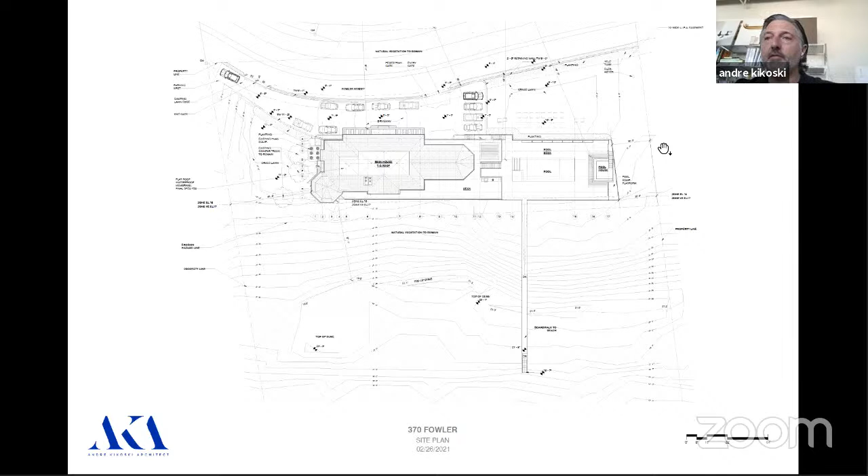So the site plan is very straightforward. The ground floor has a 300 square foot entry zone right off the driveway, and is otherwise storage and parking.

And then when you go up a level to the first floor, the house is currently an upside down house, and we are preserving that. So there's a central axial staircase and landing opening into a den. Otherwise, it's bedrooms and mechanical rooms and some family lounge space, with a pool house at the end of the pool, which is also existing.

And then we go up a level to the second floor of the house, where with a few tweaks, the plan is intact as well. There's a large lofty living room where you actually see through the house. Adjacent to that is the dining room and media room, with the current kitchen in the nib addressing the pool. Then to the page left of the living room, we have the master suite with a sitting room and his and her baths.

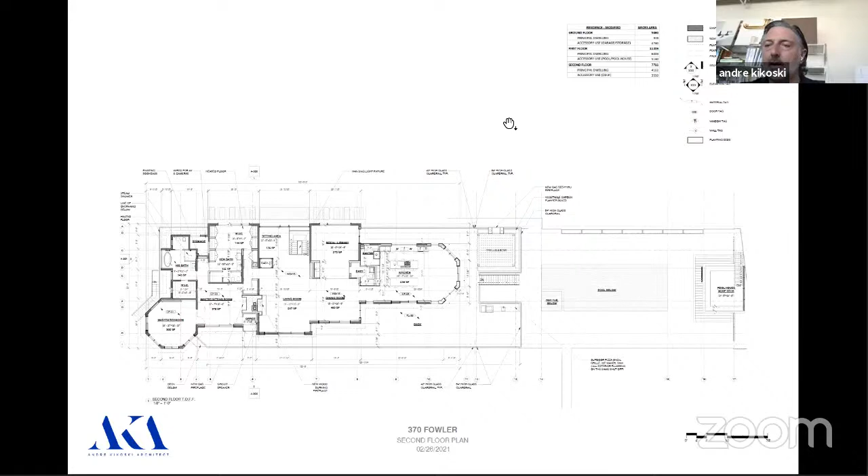So again, we've stayed within the condition line of the existing structure with regards to the floor plan. The next page will show the same is true with the roof line.

So we can look at the elevations of the house, and what we've done is twofold. One is we wanted to remove a lot of the extraneous flourishes, wing walls that had nothing behind them, huge sweeping roof lines that didn't really contribute anything to the aesthetic of the house. Instead we thought of a board and batten style farmhouse structure where we wanted to clean up the massing and really pare down the house so that it's very crisp and clean. And of course, we wanted to open it up to the view.

So the house is on a plinth of a tumbled limestone and granite mix, and then above that we have a vertical patterned material that resembles board and batten. Given the particulars of the oceanfront and the microclimate, the effect it has on wood and siding, this material is actually a manufactured stone. It's comprised of cement, marble dust, and resin, particularly suited for oceanfront application. There's a vertical line in it that you'll see in the renderings that gives it a nice and quite beautiful scale. The roof also is a shingle style roof with a dramatically simplified roof line.

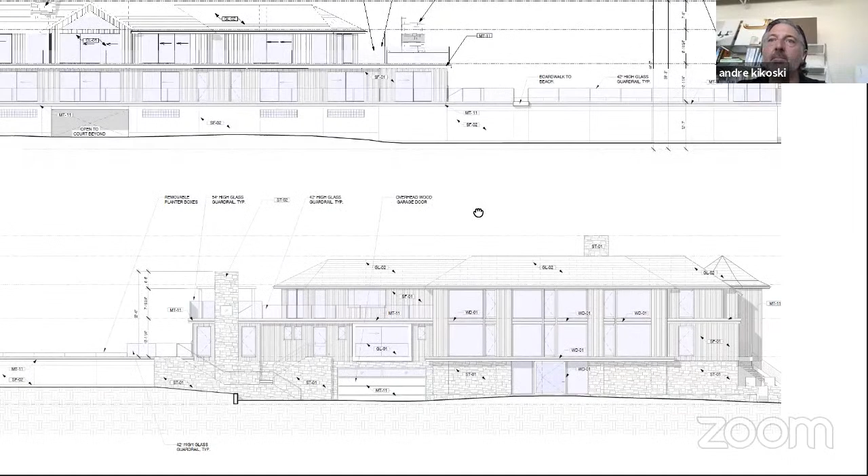And we are very sensitive to the environmental impact of this property and are working with Tesla to have solar collecting tiles on the roof. So the front of the house is essentially a farmhouse style approach that's very crisp and clean. The back of the house is opened to the ocean views beyond.

The panel system that I was talking about wraps everything above the plinth, and below the plinth, which will be obscured largely by the growth on the dunes, is a simple and very quiet stucco on the back of the house, whereas on the front of the house, it's the limestone we discussed. So it's a very crisp, clean, and simple approach to the front and rear elevations.

There are also side elevations showing the existing octagonal structure at one end of the house, sections through the pool, and a very simple and streamlined pool house at the end of the pool as well. And we've incorporated plantings throughout, so there are live green walls that live on the house as well.

I believe we could show you the materials. So the Tesla roof tiles look like a slate tile, very simple and very clean. The siding at the base is a blend of 3 different types of limestone veneer in different sizes and colors, to give it a casual and vernacular feeling, as if there's a bit of history to it.

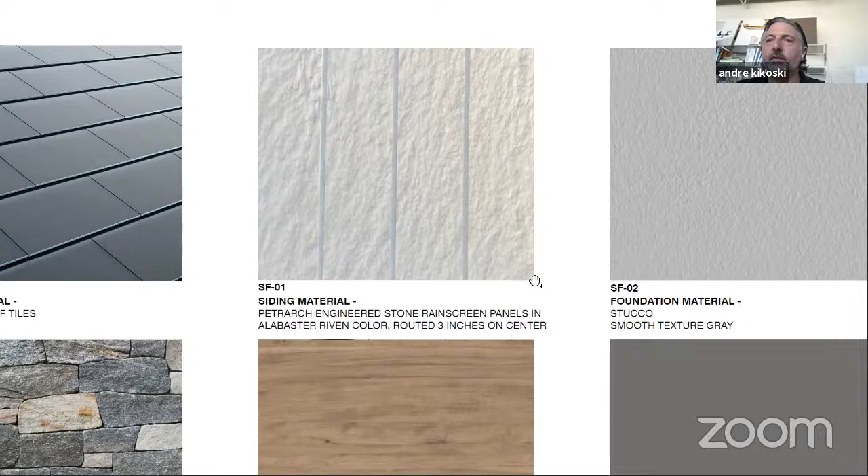There's shade and shadow even in this scan on this board. And then we're going in and routing in vertical joints every 3 inches on center, which would give the appearance of a wood structure as well. So it's a very interesting material, one that's particularly suited for the harsh, salty conditions of the oceanfront.

And then, as we mentioned, the foundation is trimmed in stucco in a complementary gray texture, and trim and gutter is in a powder coated aluminum.

Our window systems are a large format sliding, the Revival Core Vision Plus, where the mullions are about 3/4 of an inch. Casement windows have a heftier frame, but it's all part of a consistent package of lower profile mullions, very crisp and clean and coordinated.

There's some glass block allowing light into the basement spaces on the ocean side, and a 4-panel garage door with wood, again referencing what you would see traditionally, with a slightly cleaner twist.

And we also have shown our door hardware as directed on the application.

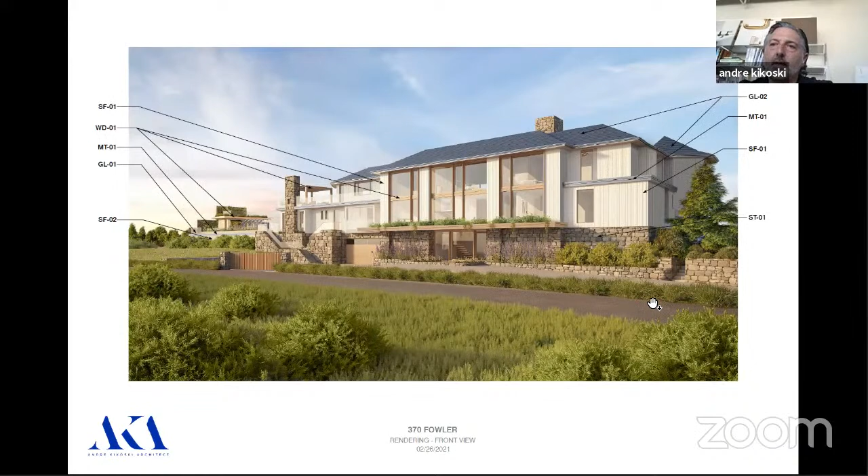The next image shows how this all comes together with the large principal entry place volume pointed out. There's a canopy, a wood trimmed canopy that's planted that you drive below, a large central bay with the internal staircase on the left of that, and landings and sitting rooms above it.

You get to see the very fine texture of the riven panels, the Petrarch panels, which has a nice play of shade and shadow even in the rendering. And again, the stone reappears as trim on the chimney.

We thought of how beautiful this would be, how the material is compelling because it will look just as crisp and clean 10 years from now as the day it goes up. So the idea is that the aesthetics of the house are very much considered part of the vernacular of the farmhouse, and also to weather beautifully on the site, so they really feel like they belong there.

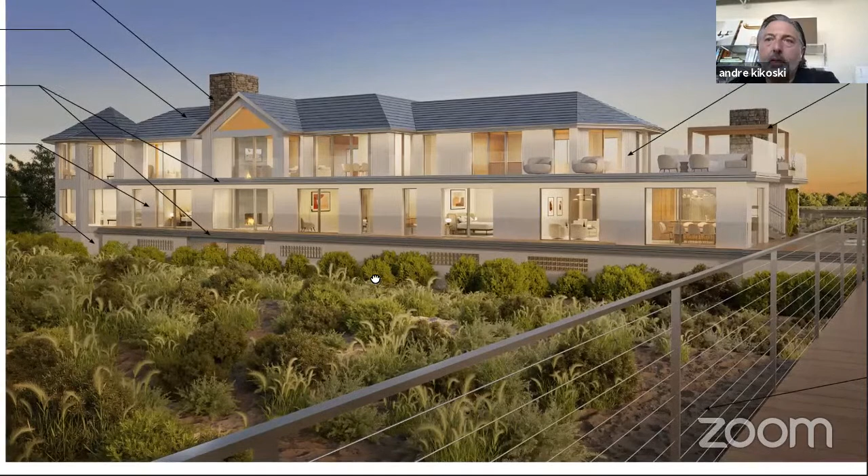And then the back of the house, which is on the next slide, shows how the house really just opens up to the view and takes advantage of its setting on the dunes, following the openings, the apertures of the existing residence, and we've just kind of enlarged them to take advantage of the waterfront location.

Again, very, very simple and clean. There were reasons why we also wanted to break the plinth from the house above, but I just wanted to introduce the design approach and our intent to look to the vernacular that's part of the farm tradition as you pull into Fowler as an inspiration, and also to talk about our research into sustainable materials that are recycled and energy efficient and appropriate to the climate of the site.

Okay, yeah, thank you. It's quite a complete presentation.

I'm the lead board member on this application. My comments are this, and bear in mind, this is a preliminary, so we will not be voting on it.

First of all, I think this is an improvement over what is existing. The house that is there now almost looks out of place. And I think this will probably upgrade the neighborhood also in that area. I don't have a problem with it.

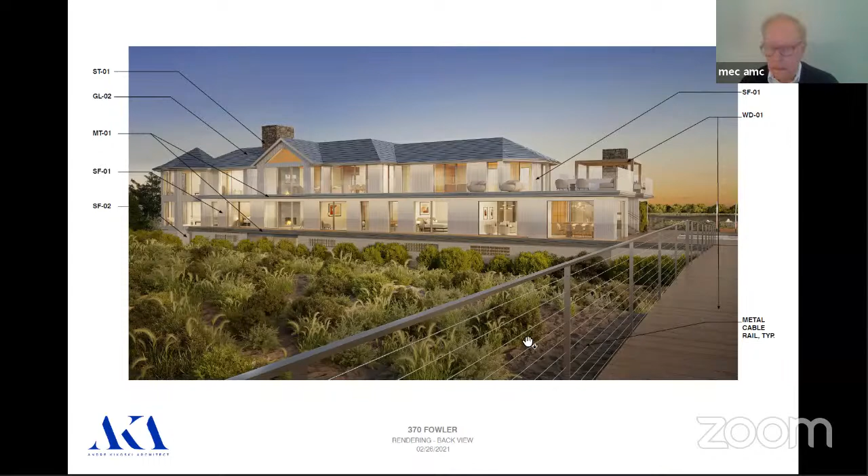One question I do have, what is going to be the square footage of the residence afterwards? Liam, do you have the tabulation of the existing versus where we wind up? Basically, while it looks - oh, here we go. Thank you.

Okay, just the facts, Liam. Yeah, so here we go. The first floor, the principal dwelling, is 6,000 square feet. And the second floor is 4,000 square feet.

Okay, when you do submit this, it will have to come before a full board review because of the square footage.

Okay, got it. So, that's my comments. Mr. Jankowski, comments?

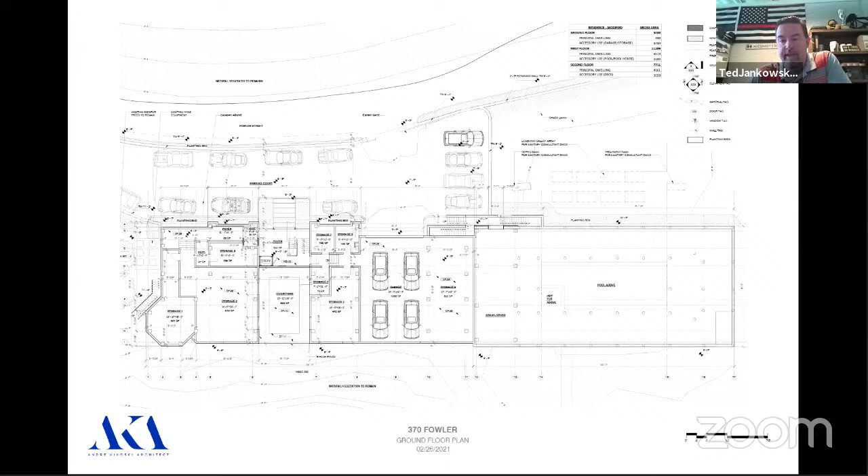I think it looks good. I like how we kept pretty much the same layout that the original house had. I think you did a really good job, Andre. It looks really good.

Thank you. We have exceptionally wonderful clients, and they've also wanted to do something that is thoughtful and meaningful. So we're lucky that we have such a wonderful team. Okay, so thank you.

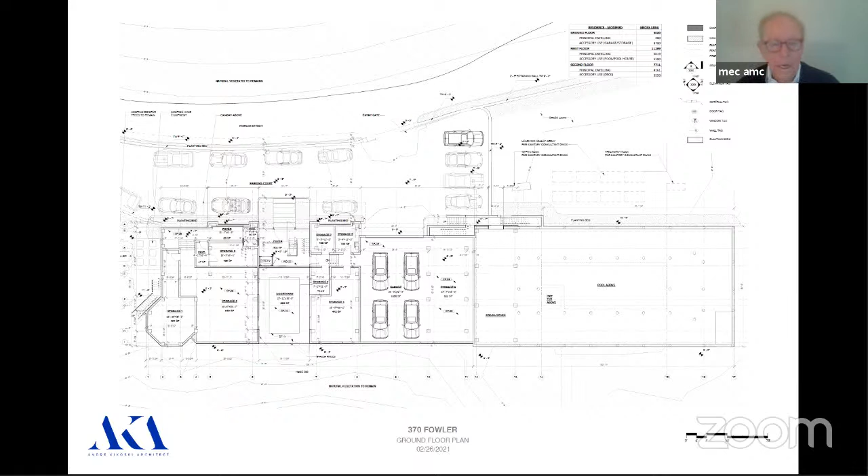Thank you, Mr. Jankowski. Mr. Burke, comments? No, I was just curious if the Tesla roof panels cover the entire house.

They cover the entire structure, they do, except for the flat portion on top of the house. And then it's just simply a question of, based on a solar map that they prepare, some of the tiles are active and some of the tiles are not active, but there's a consistent aesthetic of all of them.

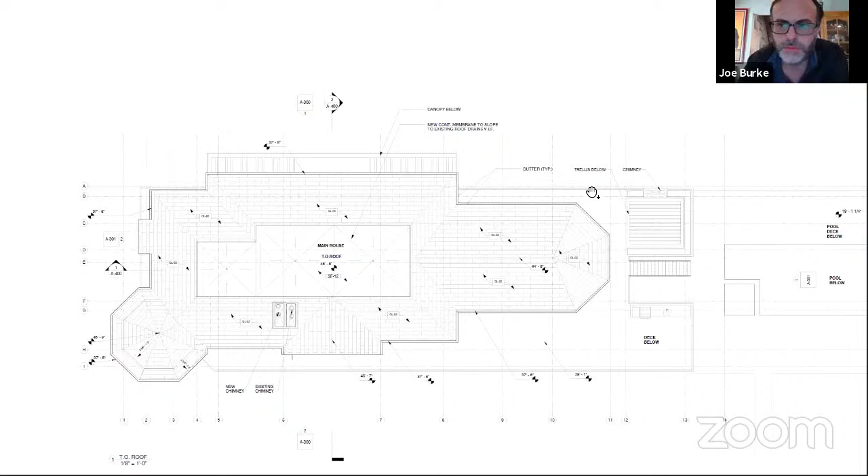Okay, thank you. I was happy to see this. This looks like we can maybe get past that ungainly panel impasse, so that you have something that pretty much looks like black slate and is uniform as opposed to sticking out. No matter what you do with the current solar panel technology, it looks like a sore thumb.

This is just so exciting, actually. I agree. Yeah, I mean, right now that's all I'm using is the Tesla panels. Oh, brilliant. Okay, great.

Ms. Keyes, comments? I agree that the place is beautiful, and I think it's fantastic. I love the Tesla tiles.

I really would like to see a landscape view and where in the dunes all of that decking is going. Because is that new, the decking, just from the beach view? Did you want me to respond to that?

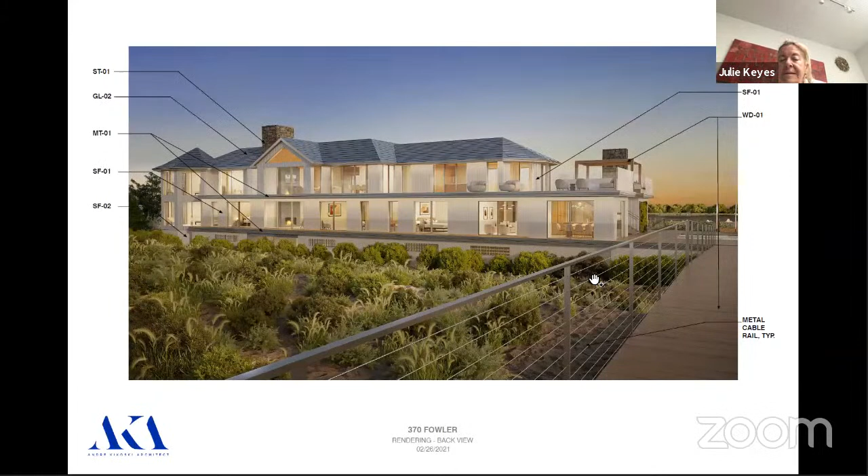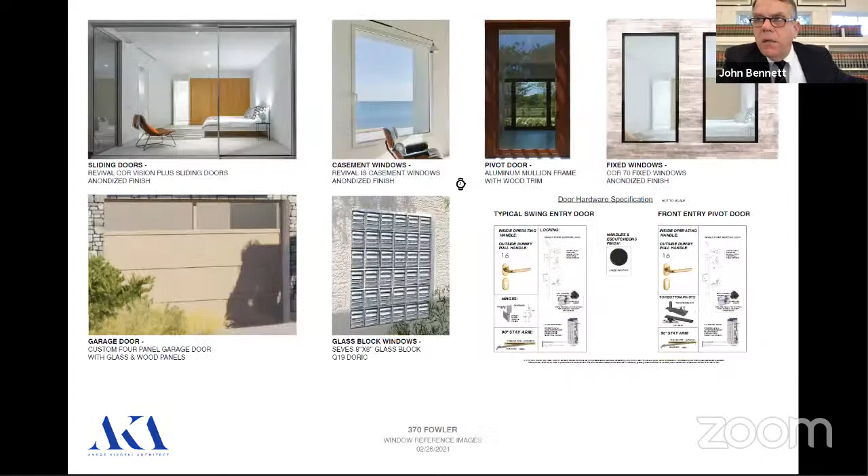I would like you to. Is there a pool in the dunes here? Is that new? No. The pool is right, it is. Everything has to be behind the existing southerly face of the house. And everything that's being done here has not only been conformed but vetted with the building department.

But yeah, I think it would be helpful to have a site plan which shows that. I also feel that, being that it's on the dunes, there's two real faces. The face that the water sees is as important as the face from the front. So I'm just curious as to what that view is and how much decking is into the dunes. Just curious, but I do think it's beautiful also.

Well, I'll just say that none of it is actually in the dune. That's just as a lawyer, a land use lawyer. I just want to clarify, we're not in the dune. But it's the view also.

Of course. And Andre, I would just clarify that all of the existing outdoor decking is remaining. It's just moving up vertically. So there's no new expansion beyond the existing footprint of the house.

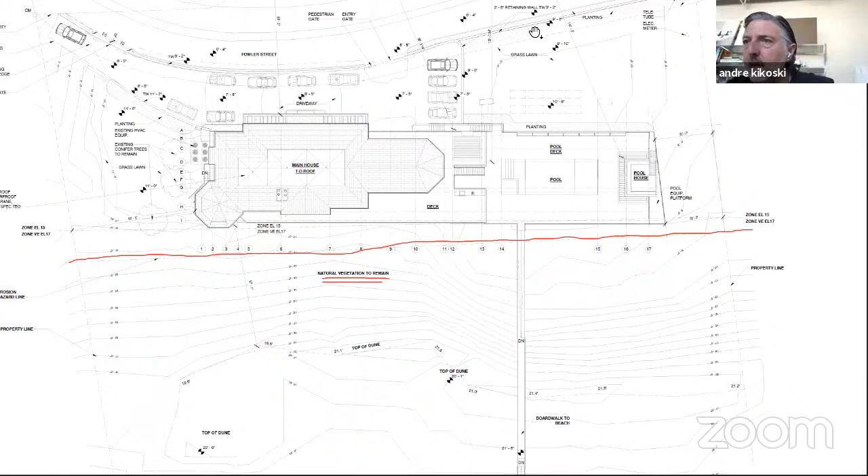Thank you. The sole exception is behind the pool house. We've added a triangular wedge, which Liam can sketch out. But that's on the landward side of the house.

That's on the landward side, and it's a cantilevered area, and it was pre-approved by the Department of Buildings. Okay, thank you so much. No impact, no expansion beyond what's there.

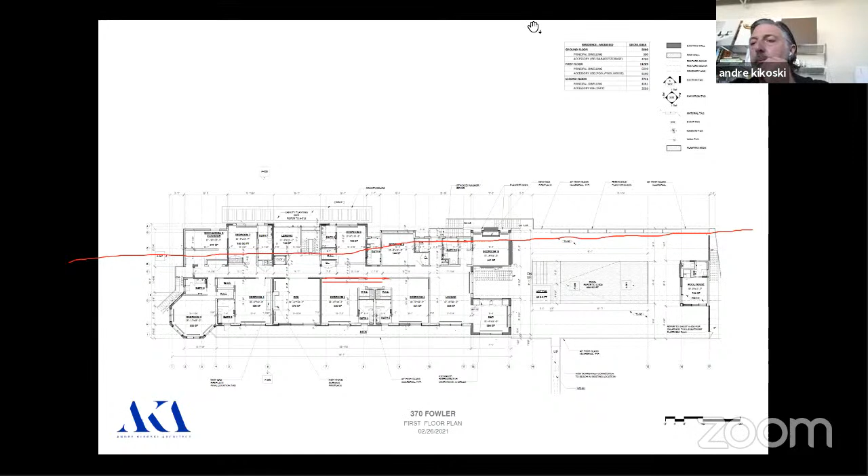Of course. Andre, can we get, for the formal presentation, a line of sight or a view to see what the person on the beach is going to see? I think that was one of the concerns. Yeah, we can certainly create that rendering. Absolutely, thank you.

Okay, fine. Thank you, Mr. Bennett, for that suggestion. I was going to make it if you didn't, but sorry.

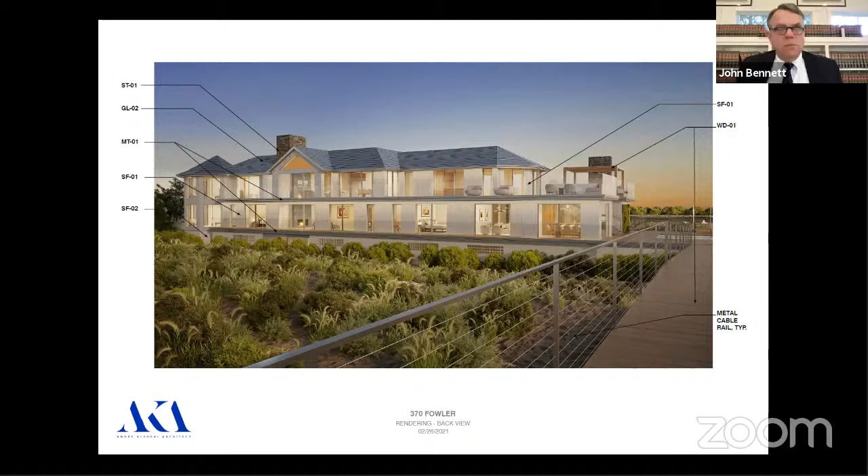Anyway, okay, is there any comments or questions you have of the board before we adjourn this? I don't think so. I think it's been very, very helpful. And I think we're done, right, Andre? Yes, thank you. Yeah, and I think it's very helpful with all the drawings you had and the presentation.

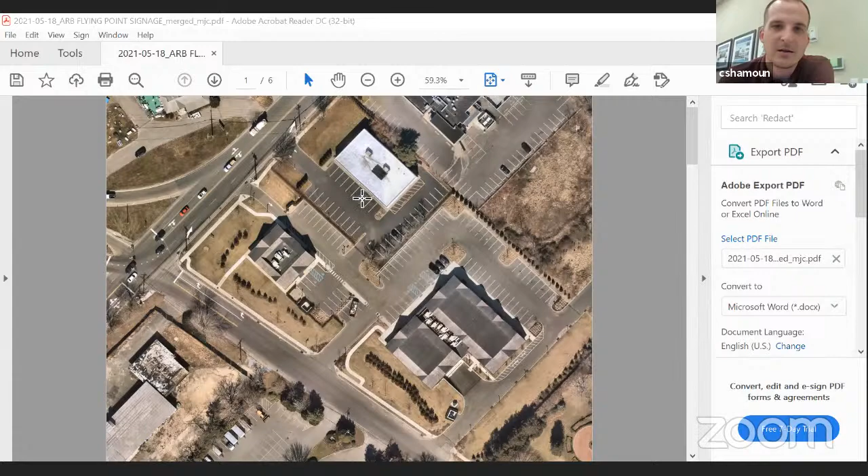This is where County Road 39 ends over here. Flying Point Road is here, Montauk Highway is for this site. This is the Flying Point site plan that was approved back in 2016. So they're doing two signs, one on each property.

There's going to be a monument sign located here on the corner, wedge shaped, and then a directory sign as you come in off Flying Point Road, which is here. And then I do have some renderings.

Pull it up for you. So this is going to be the monument sign as proposed on Montauk Highway. This is similar to, if you recall, the Farrell site plan in Bridgehampton—he has an existing sign that looks like this. It's a sort of brushed metal with blue. This is going to be along Montauk Highway.

Let me go back to the other view—the view from above. Measurements, it all conforms to code in terms of size. And this will be the directory sign, off Flying Point Road, just to tell you what's within the complex. Very simple, same colors, brushed aluminum, and the blue with the Pantone number on top.

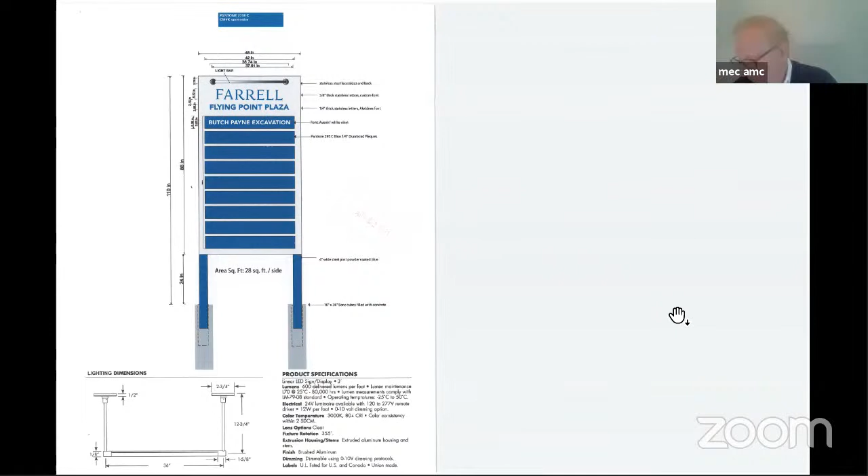Okay, Matthew, we went over one of these at one time. Everyone on the board had concerns about that monument sign in the front—wanted it smaller, wanted it less reflective. Is that going to be the case? I believe it's smaller than the old one, I'll have to verify. In terms of reflective, I couldn't tell you—it's stainless steel, brushed, so not a mirror finish, but it's metal so there might be something to it.

This is a concern, a safety concern also, correct, especially in that area. And that's why all of us, I think, were in agreement on letting him put a larger directory sign where you're proposing that new directory sign—not here, but the other one.

Could you get back to us on that then? Yeah, I'll speak to the applicant, I'll be able to give you guys an update. And then we'll go from there—if you're comfortable with the directory sign, we can move forward with that. That's fine, and then I can send them back for the monument. Okay, yeah, I'm the lead on this anyway.

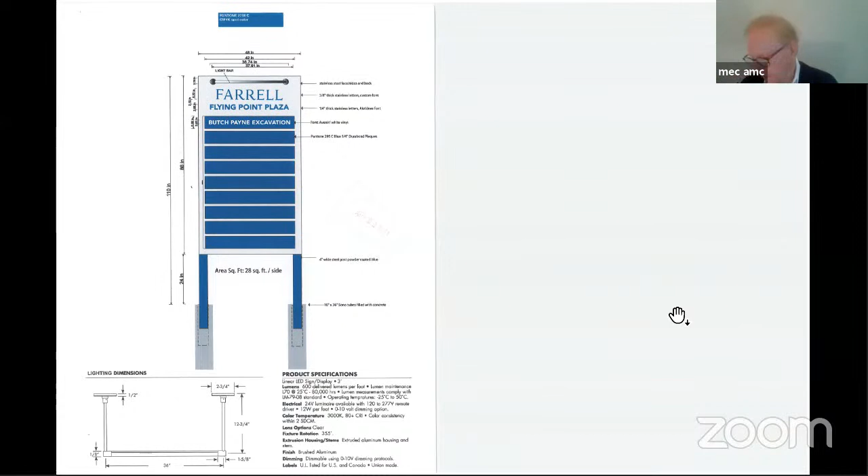Again, I don't have a problem with it. I would even be okay if you wanted to make it larger, because it's not going to be facing the busy intersections or whatever. But it's the blue, and I guess this is almost what we had seen before, but it looks like it's in a smaller section. I'm okay with this, I don't have a problem with it.

Mr. Jankowski, comments? Matthew, just go back to the first one and then the site plan, just to see where it is. Right here. Yeah, you can see that. And what's the setback on that? It's 20 feet from the property lines. It is, right? All right.

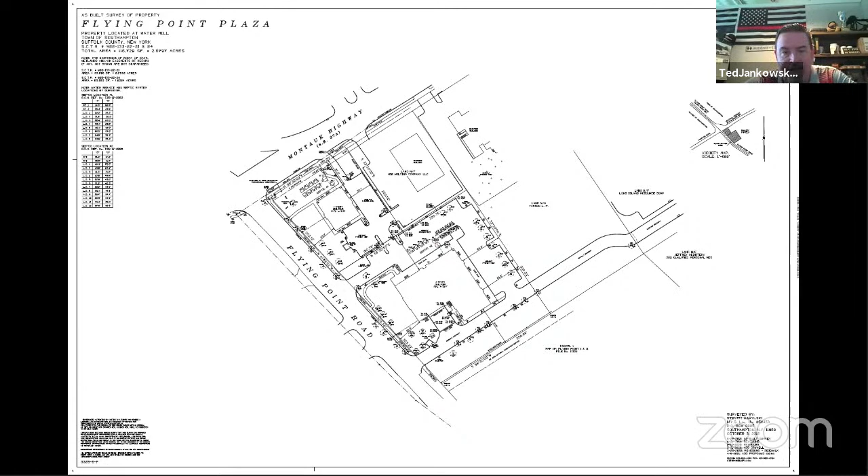And it looks low—I guess that metal's probably going to be like a dull kind of finish. Correct, yep. And I love the fact that you can see the Montauk Highway 2, I like that for EMS stuff, and that's nice and big.

So that looks fine, I don't have any issues with it. Okay, Mr. Burke, the monument? I agree with Ted, I don't have any issues with either. Okay, Ms. Keys? I have no issues.

Okay, on this one, this is an administrative review. It's a site plan, planning board approval. Oh okay, then you're going to get just a transmittal letter. Correct.

Okay, now what about the directory sign? Like I said, I don't have a problem with that at all. Mr. Jankowski? Same, no issues with that whatsoever. Mr. Burke? No issues. Ms. Keys? None here.

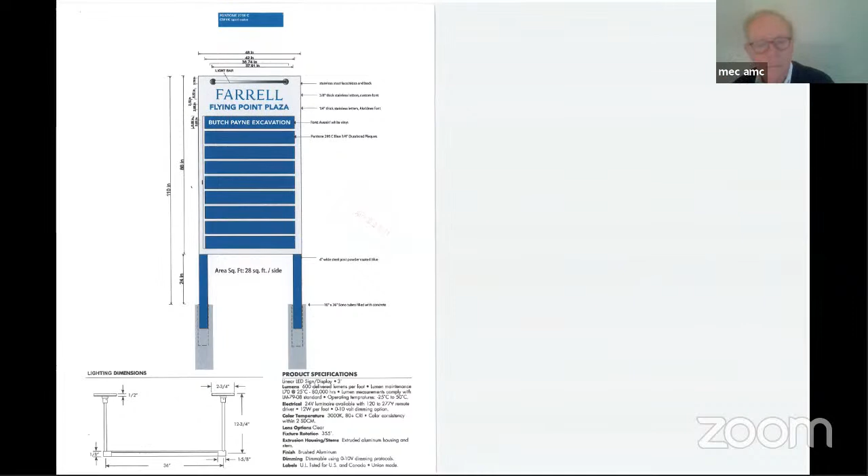Okay, fine. Are there any comments from the public on this? If none, then we'll just send a transmittal letter to the planning board. Thank you. Don't go away, Matthew.

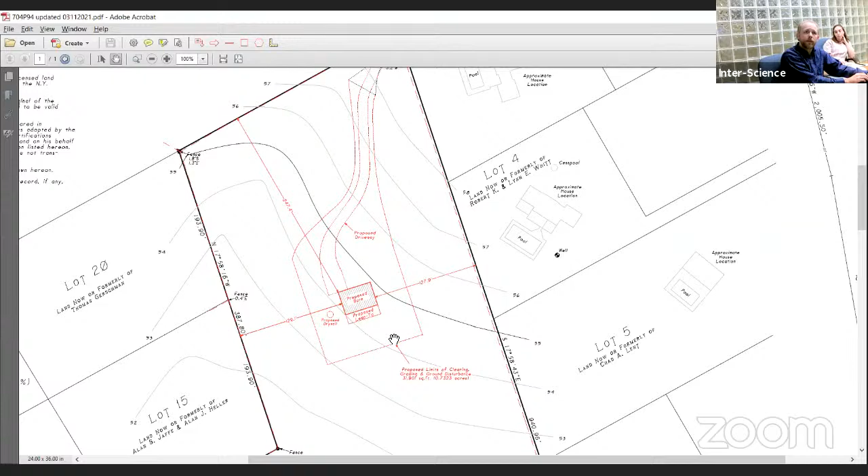The plans provided include renderings, and there's also a lean-to on the south side of the building, just for the storage of some equipment and some other materials.

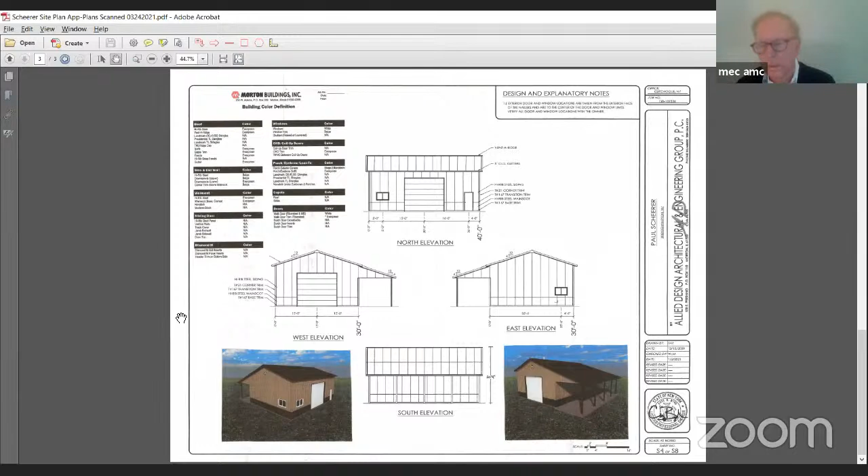Mr. Rump is not available, he would be the lead on this, so I will take his place. I'm familiar with the lot and the area, I do not have a problem with it, especially since you're screening it on all sides. I have no issues. Mr. Jankowski, comments? I'm going to go with you on this one, no issues whatsoever. Mr. Burke? I agree, no issues here. Ms. Keys? No issues. Okay, fine, thank you.

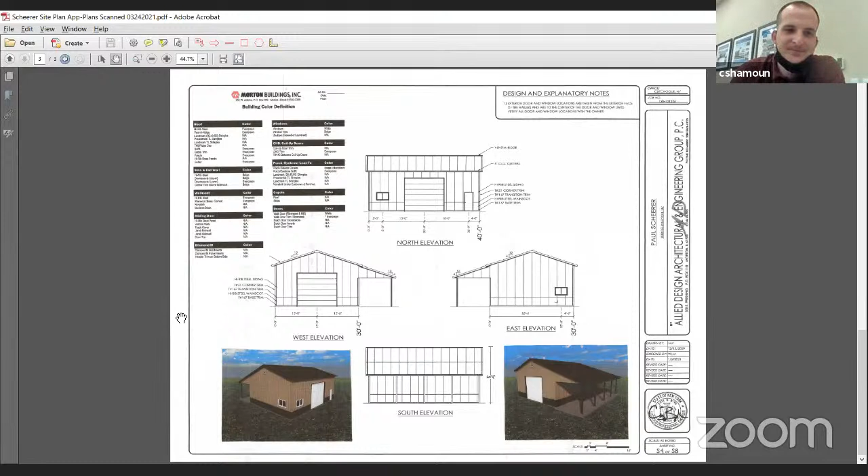Thank you, Matthew, we will be sending over a transmittal letter on this. Thanks, Mike. There's no comments from the public on this, so that's all right. Next we have...

Atlantic Golf Club, 1640 Scuttle Hole Road, Bridgehampton. Ms. Shea, thank you for being here.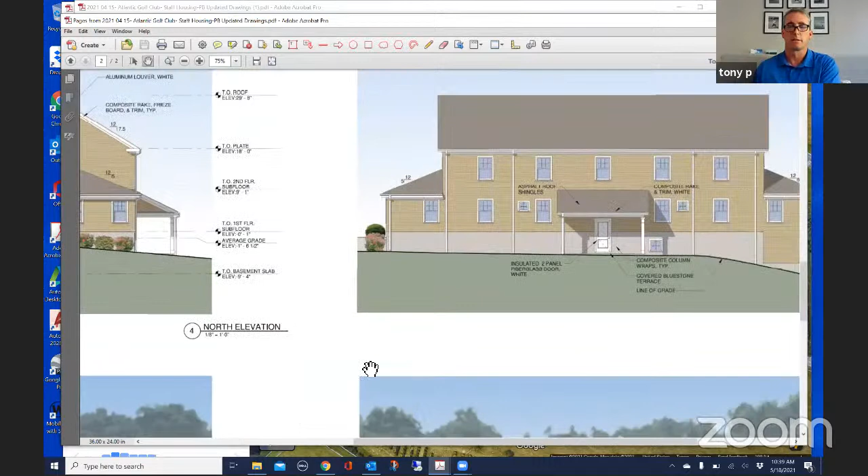The massing was done such that, if I show you the back of the structure, which is what faces the gully, this is the back of the structure here. So that's where we basically kept the larger elevation and broke down the front elevation, recessing the two sides with a small entrance over to the side. The plantings are shown here as best we could, but they're also on the landscape plan, smaller protected entry, not trying to do anything overstated, but fitting in as much as we can on Scuttle Hole Road.

The footprint of this structure is 3,000 square feet, and has a smaller footprint than if you can look at the neighboring adjacent structures.

In terms of the plans, the first floor plan has the bedrooms and everything located towards the back, and a small lounge and kitchen towards the front with some storage and laundry.

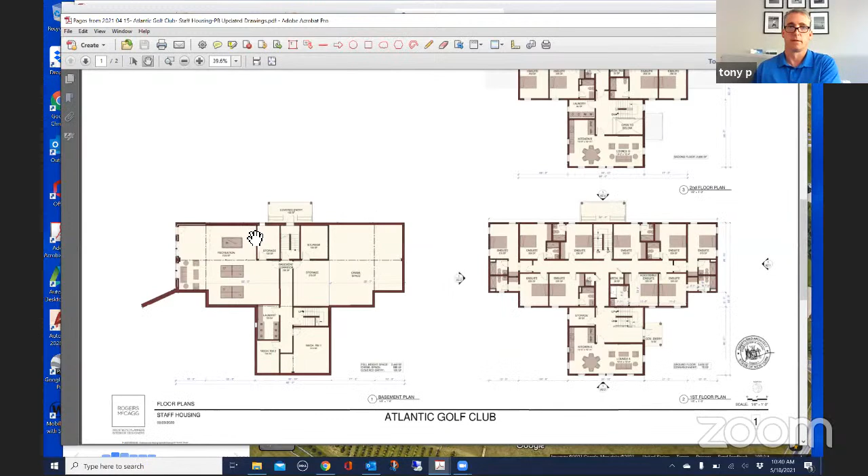If there's any questions, be glad to take them. Okay, well, we'll have comments, and Mr. Rump is the lead, but since he had to recuse himself anyway, Mr. Jankowski, I think you're more familiar with this golf course area than I am. Would you mind taking over as the lead on this?

Not a problem. Tony, can you go back to that one that was like the aerial view that showed the other houses, the neighbors? This here? Yeah. Now, do you guys own that little one also? Is that you guys? No, no. All right. And then the house is going where the dirt is that I can see right here, right?

It's going over here. Oh, so it's going to be in front of that one. Oh yeah, okay, I couldn't figure out just even from this map. All right, awesome, so that's where that's going. So that house already has screening and stuff like that, and you're going to take care of the front. So I think it's good.

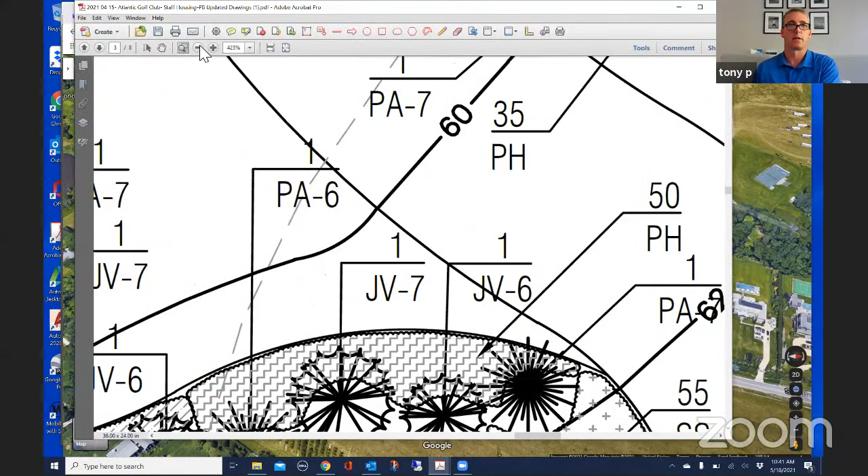We're actually adding to the screening along there as well. I got no issues then. Good job. Okay, Mr. Burke, comments? No, no issues.

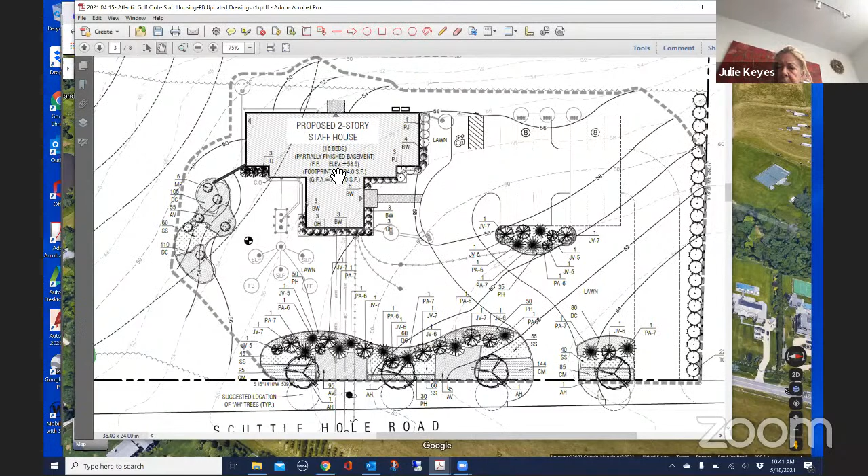Okay, Ms. Keyes, comments? Yeah, sorry, how many bedrooms is this house? Let me go back to the plan for you. It's a staff housing, so you have 8 on the one, and then there are 8 up above. So it's 16 bedrooms.

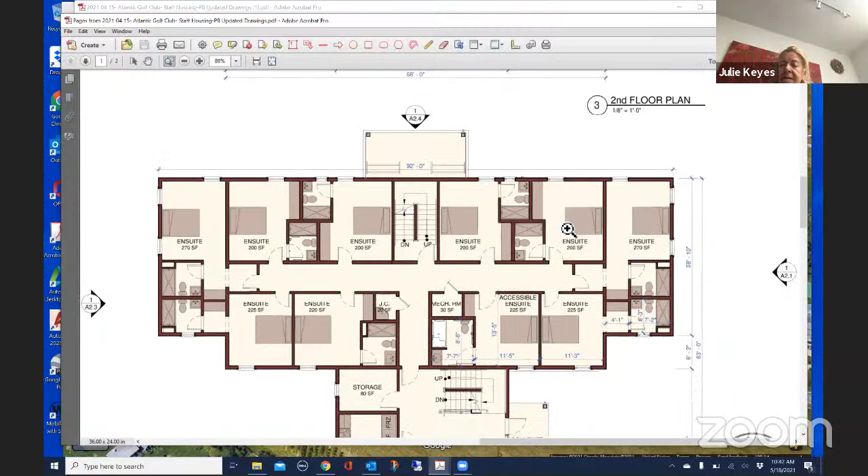And what are the tiles? What is the outside paneling? Cedar, the siding? It's all cedar siding, yes. And the roof? The roof is asphalt shingle.

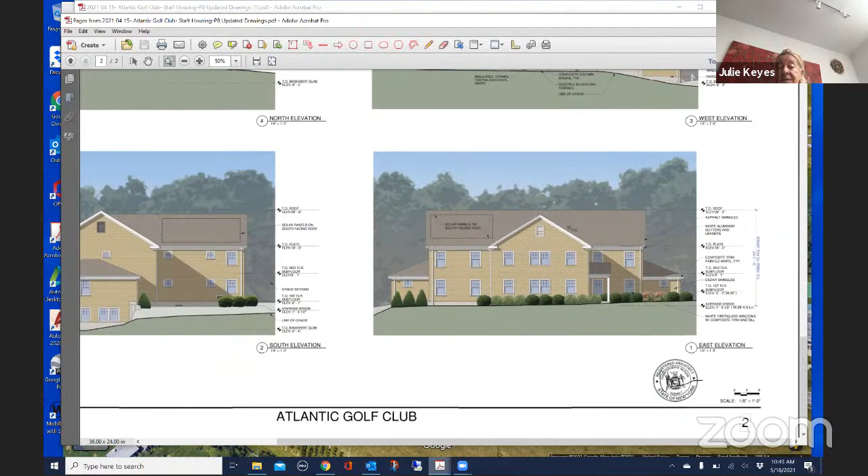I mean, it's okay, it's just large, it's big, it's a big structure right there, and I actually know where it is because I have my horse right behind there. And the vista right there that it's going to block is pretty beautiful. I mean, I drive that road all the time, and so I just wonder how you're really going to block it because the pond is right there.

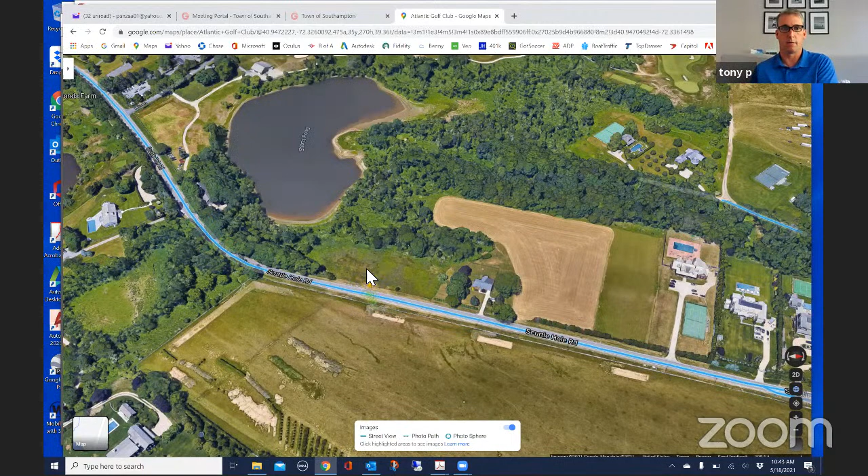Yeah, that's the vista that we wanted to preserve, that's why we sited where we did. This doesn't help on Google, sorry, this was during the Classic a few years back, but the vista is there and that's anticipated to continue.

But then it's all going to be screened through there. I mean, it's basically lost, even though... well, the long screening would be here. So if I move back up the road, the screening is here so that as you're coming down - sorry the truck is in the way, but I promise you Shorts Pond is behind that. I mean, it's just a shame because it's such a beautiful spot, and that whole area is just changing so quickly. It just isn't, anyway. It's all right.

Okay, that concludes your comments, Ms. Keyes? Yeah, sorry, okay. I do not have a difficulty with it. I share Ms. Keyes's concern for the view of the pond. And from what I'm seeing, I think you will still see it, even with this residence in place and their screening. So you will get a view as you pass on the road.

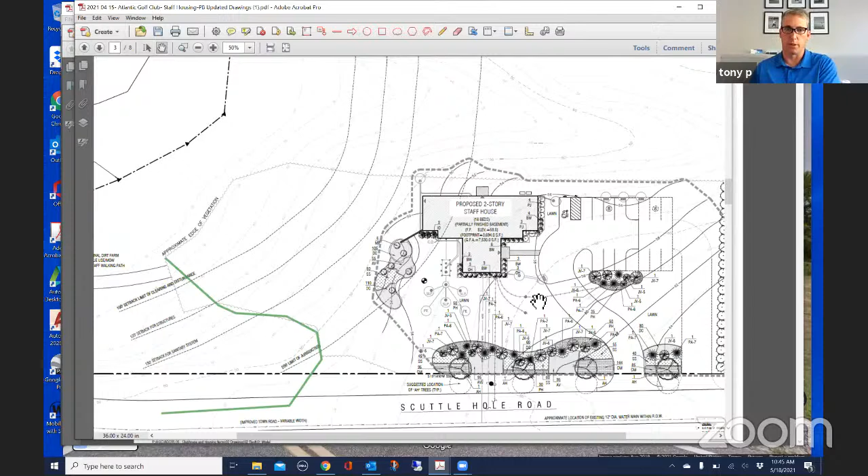Would like to ask a question. Does Atlantic own that pond? It's part of the, within the Atlantic... whether or not you can own a pond, I guess that was a separate question. Well, do you own the land around the pond? Yes, yes. Okay, that's my question. Then you have actual authority to make sure that people traveling on the road can see the pond. Yes, Atlantic owns the land in here. Yes, right, it's contiguous, it's a contiguous portion of the golf club.

Right, so I think that is important to keep that view of the pond, even though it's going to be less than before, because that would be a nice sequential experience for people on Scuttle Hole Road. But as far as the project, I don't have a problem with it at all. I think you've sufficiently screened it, and I think it'll blend into the area.

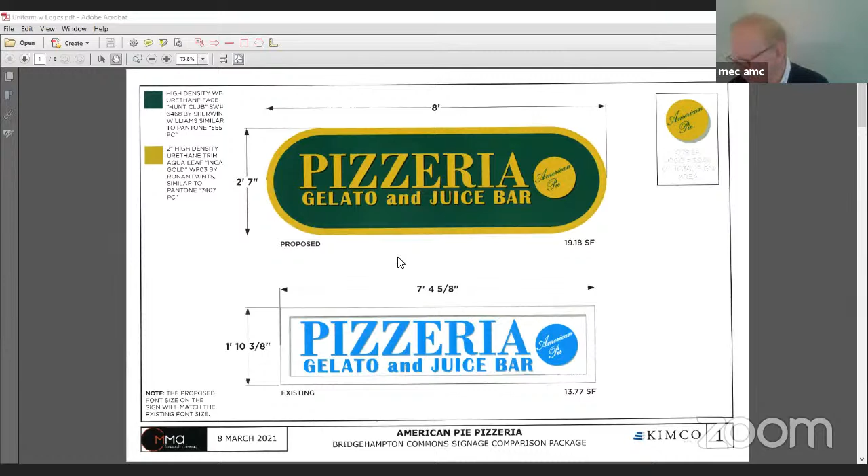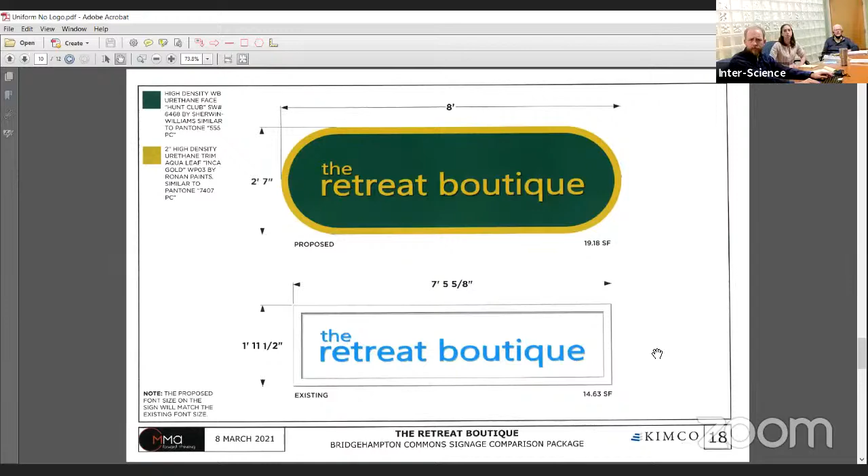Next item is Angel Tips. One second. 18? Oh, 18? Okay. Number 18? What's the number of the item right now? Number 2. Oh, okay. I apologize, I tried to keep them in order. Sorry, I had separated them into two different files, thinking we were going to go through it differently. Just give me one second.

Who's talking, who's representing? Mike Shiano. Identify yourself please. Sure, I'm sorry, Michael Shiano from Inter-Science Research Associates. I've taken over this from Lisa. Who took it over from Brian? Just for the record, took it over from Brian. And also with me is Sabrina Kelly from our office. We're going to be working on this together. Okay.

And there's no logo on this one, Michael? Right, no logo, but we're going to vote on all of this anyway. I recommend approval. Okay, Ms. Keyes? I agree. Okay, motion has been made and seconded. Ms. Keyes, you seconded it? Yes, I second it. Motion has been made and seconded to approve Angel Tips. All those in favor? Aye. Aye. Okay, fine, done.

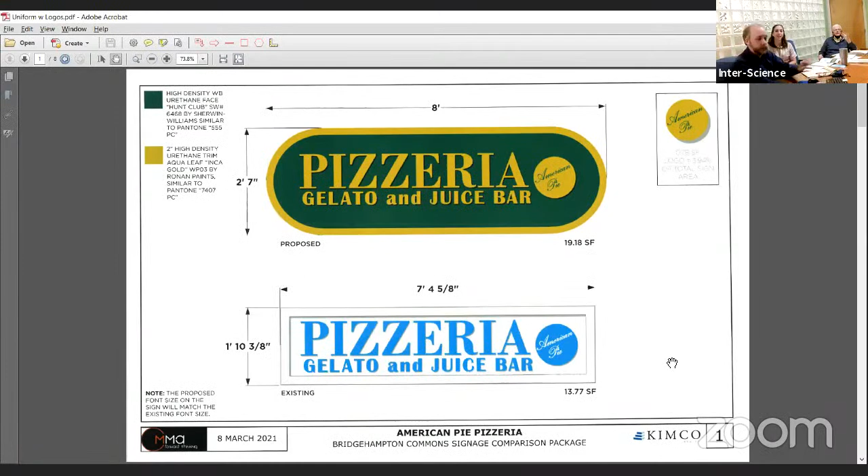All right, that one's done. Okay, the AT&T, I'm going to mention this. The logo they have here is actually larger than what they use for most of their stores. I would prefer if they would reduce their logo to the same size that they use in their other stores, which is a little larger than the lettering, but not as large as this.

Mr. Jankowski, comments? Yeah, I'm fine either way. If they make it smaller, because they're saying 10% of the sign, if they make it so that's the same size as the A, I'm good either way. Okay, Ms. Keyes? I agree with Mr. Cherrier, so I agree with him.

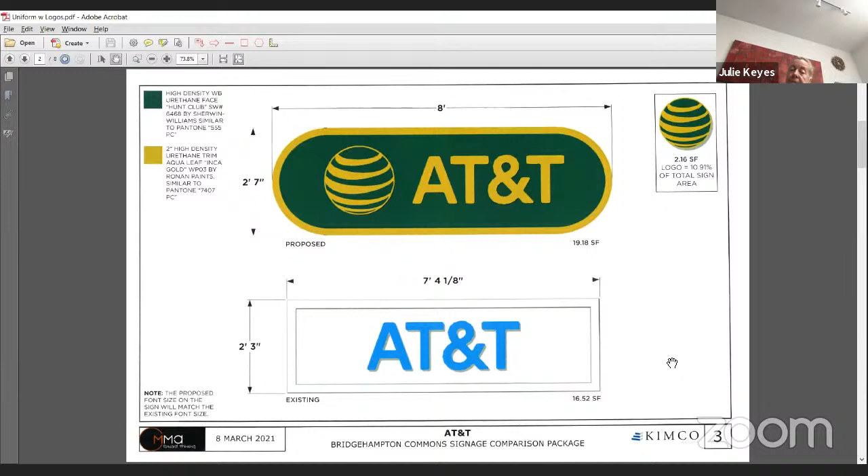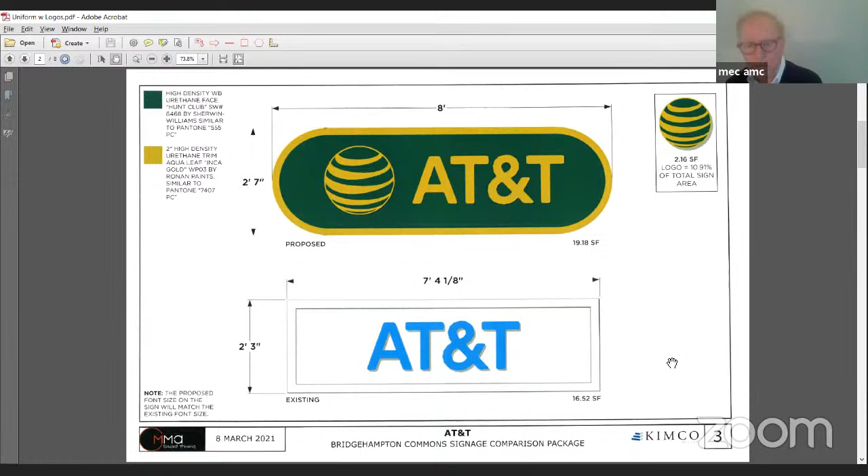Okay, then on this particular one, we'd like to have it reduced. It can be a little larger than the lettering, but not as large as what's there. Do I hear a motion to approve? Motion to approve. Second. With the reduction, motion has been made and seconded. All those in favor? Aye. And then that would just be verified, we'd submit it and one of you would verify it? Yes, since Mr. Rump can't, he's the lead for the area, you can send it to me and I can verify it. Good.

Okay, the next one is Dunkin' Donuts. This is like their standard, I don't really have a problem with it at all. Mr. Jankowski? No issues. I actually thought they were dropping the word Donuts, I just thought they were going to go by Dunkin'. I was going to mention that, I believe that they are dropping the trademark Donuts because they've kind of lost it.

So it might wind up being the Cup and Dunkin'. Yeah, that's what I thought. Well, this is what we're given now, so that's what we're going to vote on. That's okay, recommend approval. That's fine. Okay, Ms. Keyes? Second the approval. Okay, motion has been made and seconded. All those in favor? Aye. Okay, that one's done.

Next is Go Health, urgent care. Looking at it, I never liked the original sign, I thought it didn't really do too much for the building. So I prefer what they came up with, and the logo is in line with the proportions and design of the sign, so I have no problem with it.

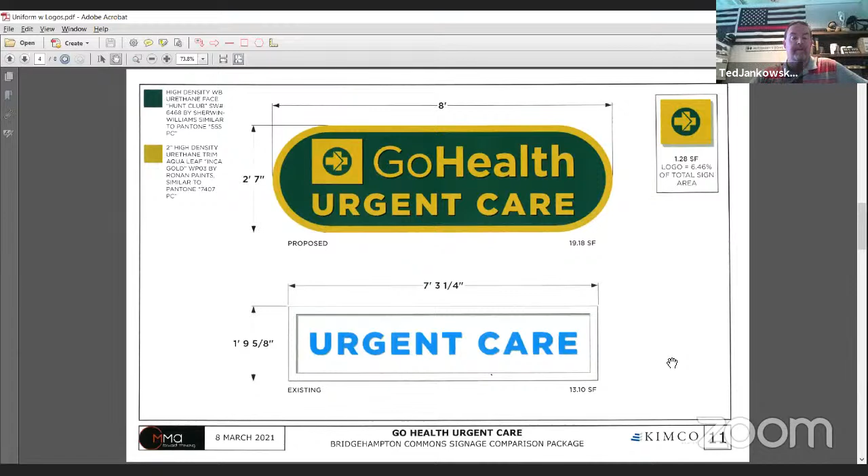Mr. Jankowski? No issues, recommend approval. Okay, Ms. Keyes? Second the approval. Mr. Jankowski, you motion on the approval, correct? Yeah, motion to approve as submitted. Okay, motion has been made and seconded on this GoHealth sign. All those in favor? Aye. Opposed? None.

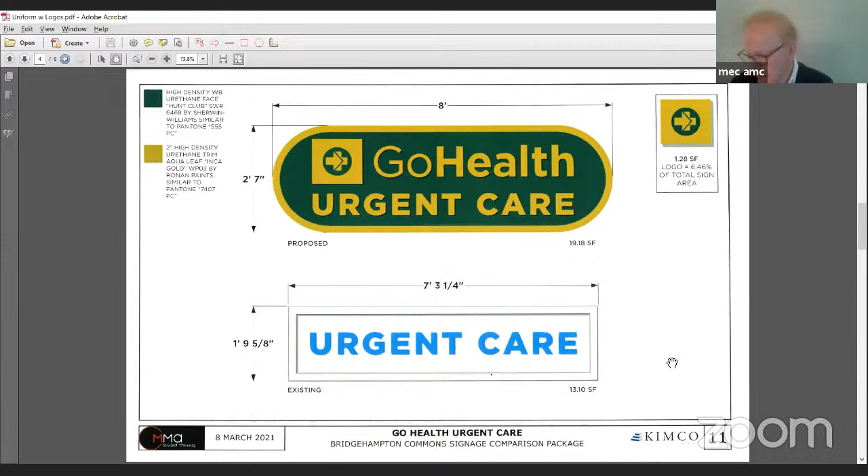Okay, the next one is M&T Bank, and this is actually two signs and they're on two sides. I don't have a problem with either one of them. Mr. Jankowski? No issues, recommend approval. Okay, Ms. Keyes? Second that. Okay, motion has been made and seconded to approve both of these signs.

I'm just looking at something. Ms. Doyle, do we have to vote on these separately or can we do both at once? You can do both at once. Okay, fine. Then this includes both signs, the one on the front and the one on the side. Motion is made and seconded. All those in favor? Aye. Okay, good.

Okay, this is different than what we were given, the Panera Bread. Looking at it now. Just one second, give us one second. I don't know if it's different. Yes.

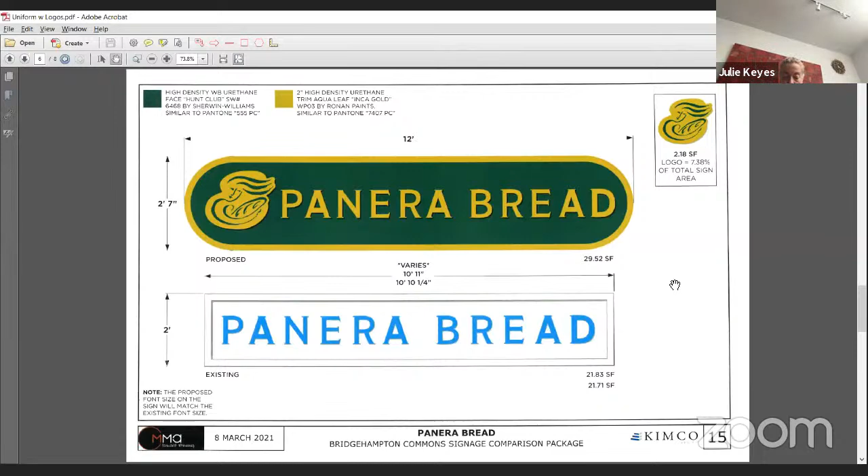Ms. Keyes? I think it's fine, actually. I agree with Mr. Cherry, but I think this one will look fine. Okay, and you second it? Second it, sorry. Motion has been made and seconded. All those in favor? Aye. Okay, so Panera Bread, as is, right? With the logo. As with the logo, no reduction. Yeah, no reduction. Okay.

Our dear friend Petco here. Okay, this was there. Mine, I would like to have the logo reduced on this, because prior they didn't have it. I'd like to have it in line, maybe a 15% reduction on the logo.

Did you say 50% or 15? No, 15, 15 to 20. Because if you do 50%, it's going to be smaller than the lettering. So would you prefer it to be the same height as the lettering? No, I think it should be a little larger, but not as large as it is. Okay, I mean if they can use that as a guide, that's my comment.

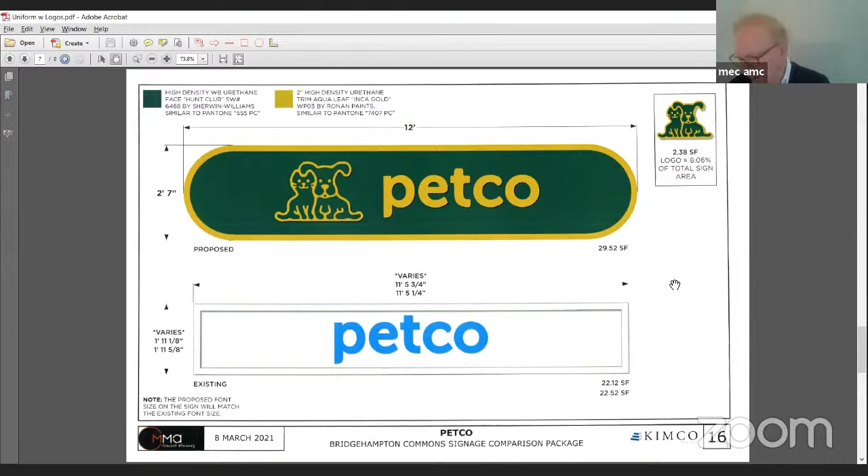Mr. Jankowski? Yeah, because it's lowercase writing that they're using, so slightly smaller, then I'm okay with it. Ms. Keyes? I agree. Do I hear a motion? Motion to approve with a slightly smaller logo, reduction of 15 to 20%. Second. Motion has been made and seconded to approve as stated. All those in favor? Aye. Okay, fine.

Next we have Verizon. I have no issues with this at all. Recommend approval. Second. Motion has been made and seconded. All those in favor? Aye. Okay, and I think that's all, that's it.

Okay, fine. And then the larger signs, the board did give comments at the last meeting. I think it was left that you wanted to review the package again, though, and the elevations. Do you want to just go through the larger ones quickly and vote on those? Yes, we are going to have to because they have changed them. And if you could bring those up, please. We'll do Ulta first.

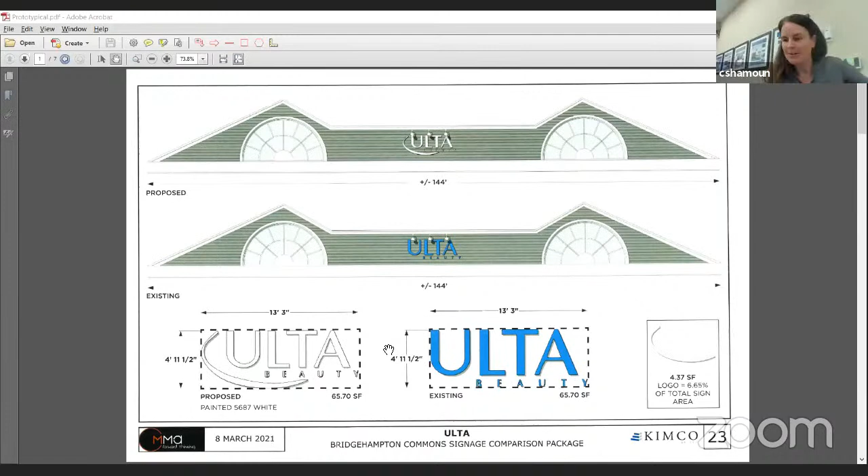I think it's okay if I leave, right? You guys got this? Okay, Ms. Shea, questions for planning? Thank you very much. Nope, good, thank you. Okay, this is Ulta, look at the existing and look at the proposed. It doesn't show it too well in this, but because of the siding color, you will be able to see it I think a little easier than the rendering shows.

And I don't have any issue with this at all. Mr. Jankowski, no issue, recommend approval. Ms. Keyes? I'll second the approval. Motion has been made and seconded to approve Ulta. All those in favor? Aye. Okay, that's Ulta, the next one.

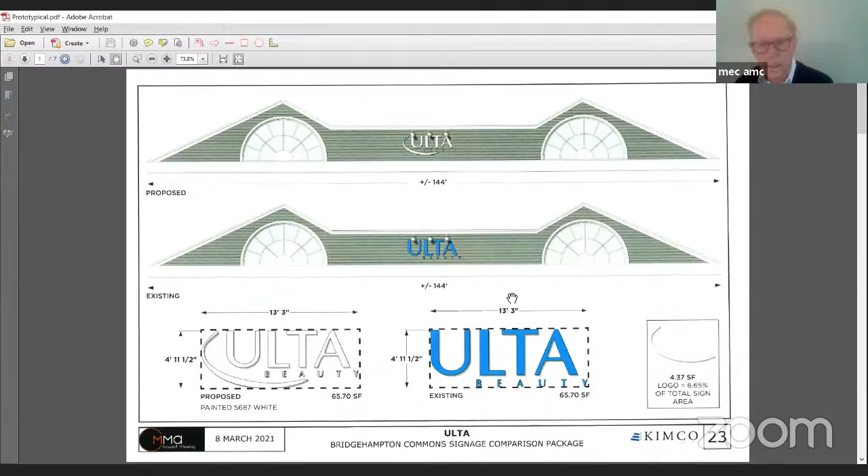King Kullen. I'm going to suggest - are they changing the color of their signage? I believe so, I believe they are changing it. Which, you mean the main sign? So they're going from the existing blue to the proposed red-orange with the yellow crown over the eye.

And all of the colors are in line with the board's recommended Pantone colors. Yeah, no, I understand, because King Kullen used to have red. I was just wondering if this is going to be more of an orange color or a red color. I believe it is the red-orange that is in the packet, in the board's recommended colors. So I know it's in there, but is King Kullen changing? Because normally they had red as a color.

Right, I believe they normally would have red. However, for this - and Therese, you can correct me if I'm wrong - they will be changing to the red-orange in order to make it more uniform with the other red-orange signs that will be used for the prototypical signs. Correct, we're trying to make the colors as consistent as possible. So the prototype King Kullen color will be used, but we're trying to make the red-orange consistent throughout the center so that there's not too many variations of red.

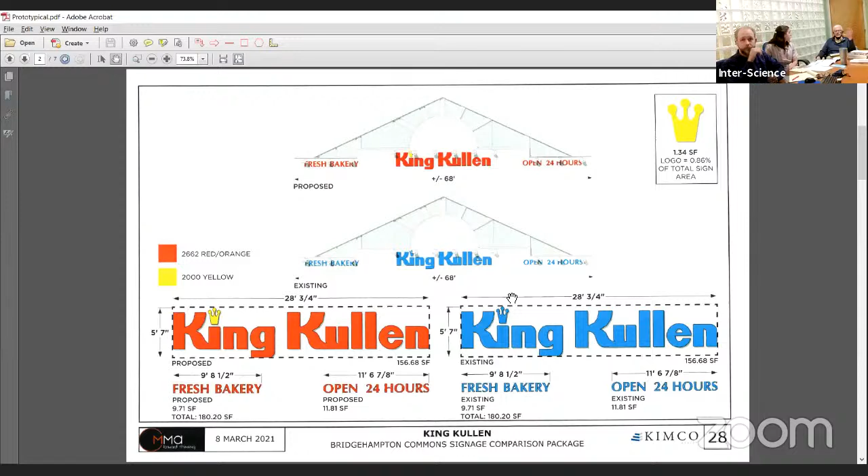Okay, fine. Yeah, I believe that the red they normally use is outside the approved colors, so we toned it down or something like that, Doris? Yeah, we're trying to keep it consistent throughout the tenants. Okay. All right.

Okay, regarding the size and the logo on it, and I see the Fresh Bakery open 24 hours. I don't have a problem with that at all. Mr. Jankowski? No issues, recommend approval as submitted. Okay, Ms. Keyes? Second that. Motion has been made and seconded to approve King Kullen and the other auxiliary signs such as Fresh Bakery and open 24 hours. All those in favor? Aye, aye, aye. Okay, it's passed.

Okay, the next one is Walgreens. This one is usually bright red, and that's going with the orange then, I assume. Yep, the red-orange. Okay, I don't have any issue with it. Mr. Jankowski? No issues, recommend approval.

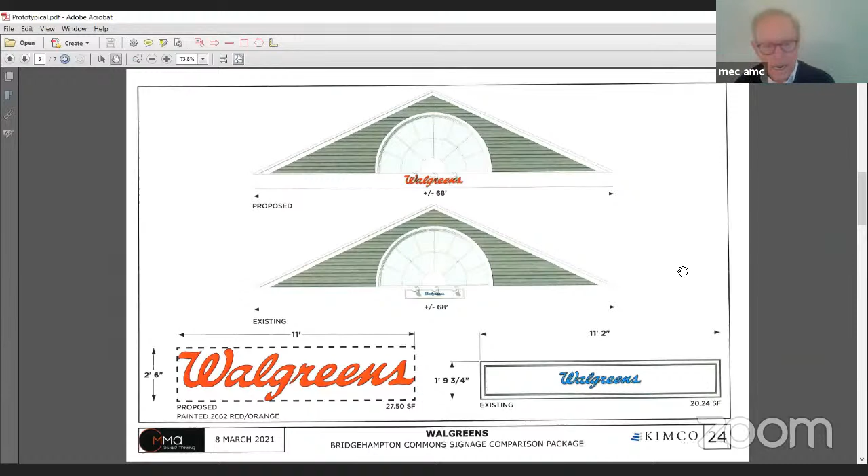Second it, please. Okay, motion has been made and seconded on approving the Walgreens sign as submitted. All those in favor? Aye. Aye. Opposed? None. Okay.

Okay, Staples. Stained blue, right? This is going from blue to white. It's the same as the Ulta, I believe. It'll be seen quite easily. I don't have any issues with it.

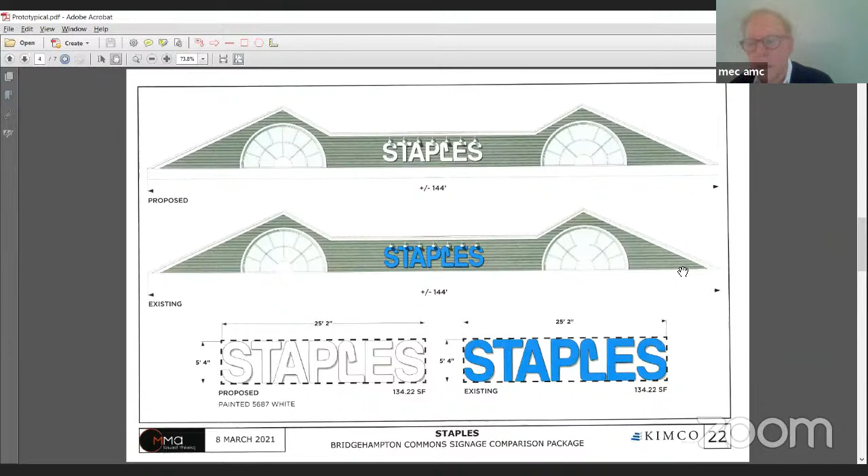And I recommend approval. Mr. Jankowski? No issues, recommend approval as submitted. Okay, Ms. Keyes? I think she's on mute. Ms. Keyes? I agree, second it. Okay, motion has been made and seconded to approve the Staples sign as submitted. All those in favor? Aye. Aye. Opposed? None. Okay, that's done.

Next is TJ Maxx. Gives you more time. All right. But, yeah, no, the person's name, Nicholas something, and...

The thing that I would like to see - I remember we went through this at one time a while ago - the TJ Maxx and the Marshalls sign are going to be close together. Do you have the elevation of that? Yep. Okay, now if there's any future ones that come up.

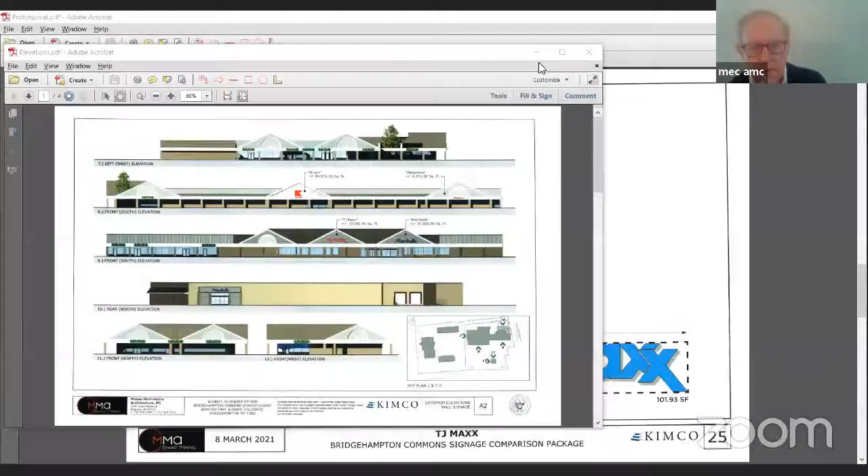Somebody forgot to move themselves out. I think that's Claire. I was.

Okay, I mean, we can do this with the Marshalls sign, but I remember my comments prior, and I looked in my notes - it was to reduce the Marshalls sign so it would look in line with the TJ Maxx, because as it looks now, it's quite a bit larger. It is.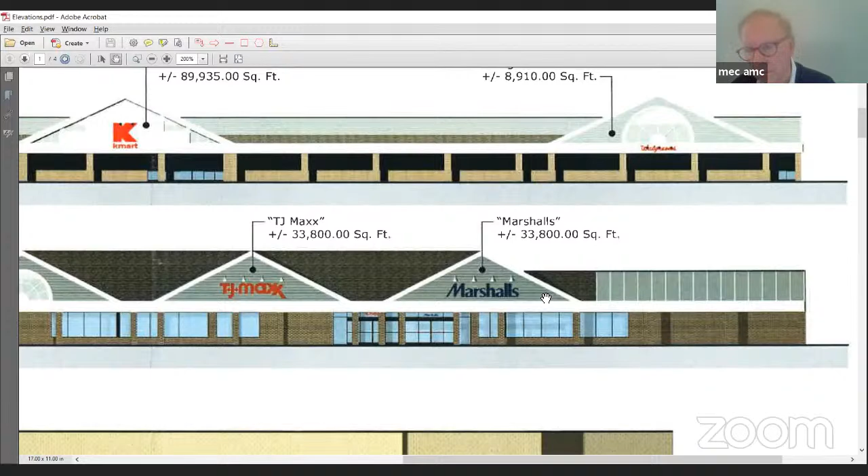But let's go through with the TJ Maxx first. Let me just check - so the Marshall sign is 3 foot 11 inches tall, and the TJ Maxx sign is 4 foot 9 inches tall. Yeah, TJ Maxx is bigger, isn't it? Yeah, but it's a little bit, by about a foot. But look at the way it looks on the elevation.

I don't see the difference. The massing of the Marshall sign is much larger looking than the TJ Maxx. It may appear larger, but you have to understand that these are concepts. They are not exactly scaled, because these are concept plans, not construction plans.

So are you saying these are not the correct sizes listed here? No, the sizes are listed correctly on the individual callouts that you see. That's what we're judging, right? No, I think we're judging the look of the concept plan. It might be the same size, but the massing of Marshalls is much greater than the TJ Maxx.

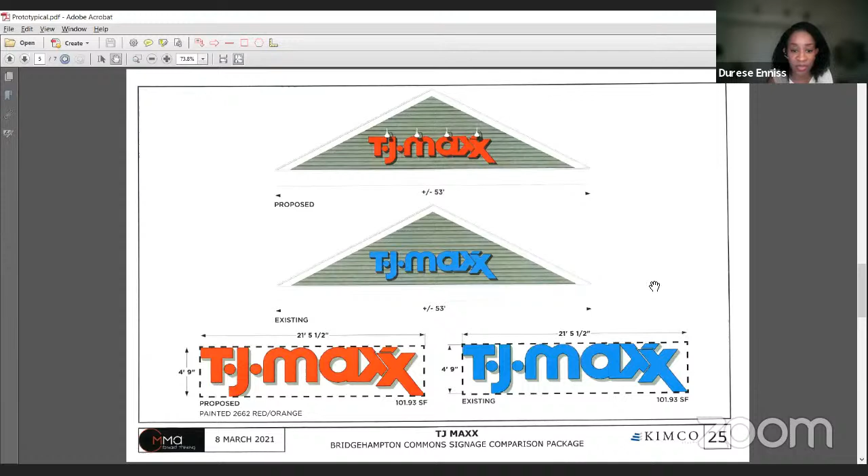So you're telling me they didn't have the actual proportions on the elevation? Well, in this particular case, if you see the measurements here, it says it's 4'9". And then if you look at the other one, Marshall's, it's 3'11". Yeah, so it's quite a bit off.

So if you need us to revise the other page to scale it a little better, we can, if that's what you need. I also think that the difference of about a foot at the scale we were looking at, it may be difficult to even see that size. So I'm not 100% certain whether that change would show in the rendering - I don't know if you'd be able to see that kind of change.

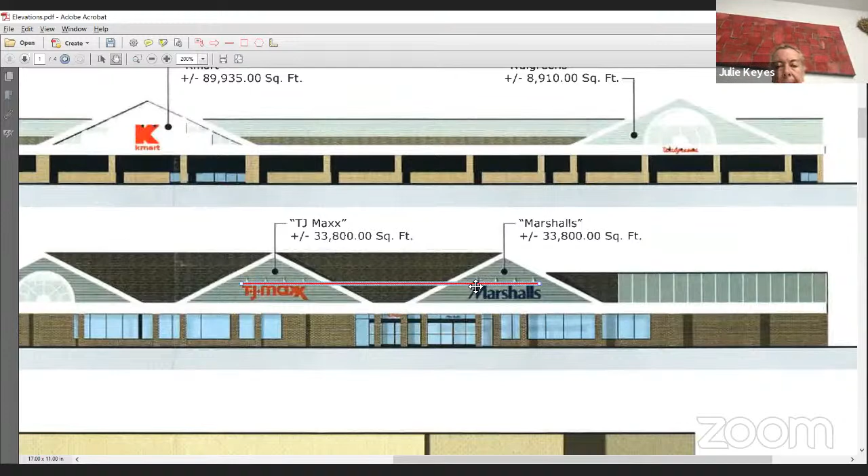Yeah, I think we will, because we're looking at massing too. As the elevation shows, the Marshall sign looks much larger than the TJ Maxx. Yeah, we can definitely adjust that. I think that if you're telling me the sizes, then no, it's not to scale at all. The Marshall sign is too large, or the TJ Maxx sign is too small.

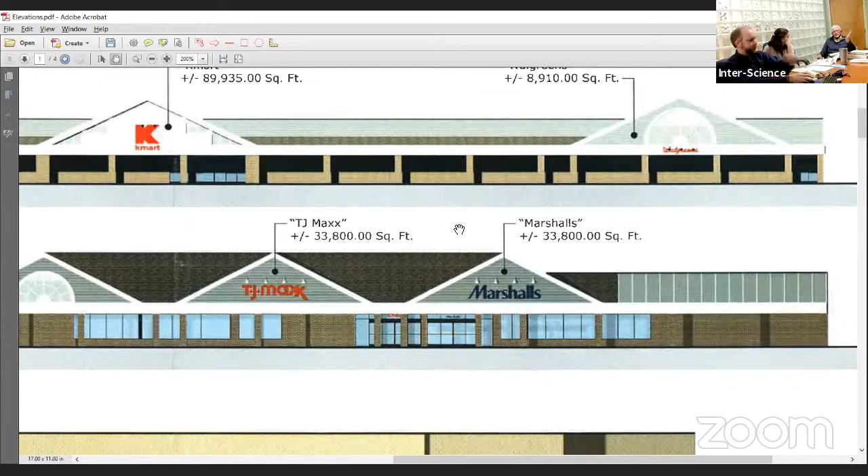But we should go by the sizes that are on the scale, because that's what it is. Are you having a problem with what you're looking at now being out of scale? Yes. I think we got to go back to the individual callouts for what the size of the sign is. It could be, for lack of a better word, an optical illusion that you're seeing there.

Well, look, it doesn't matter, because the Marshall sign is going to be the size that's listed on the plate, and it's going to look like a Marshall sign. No, we understand that. We want it to scale though. Yeah, we'll definitely send you an updated version to scale. Okay, look, the problem is in the past we've had renderings or elevations that were not to scale and they were built, and this is just eliminating problems later on.

Understood. So as far as the Marshall sign, you want it in scale with the TJ Maxx. Yeah, you can submit these later. Then I think you can approve it that way, and I think when it comes in, based upon what I'm looking at on the sizes being shown and what we're giving you, that it will be in scale.

Well, fine, you can submit it to me directly. Just get it to scale, submit it to me and I can approve it. I'm the lead for the area. Okay, that's fine, that's fair. Yeah, okay, and I'll ask the rest of the board.

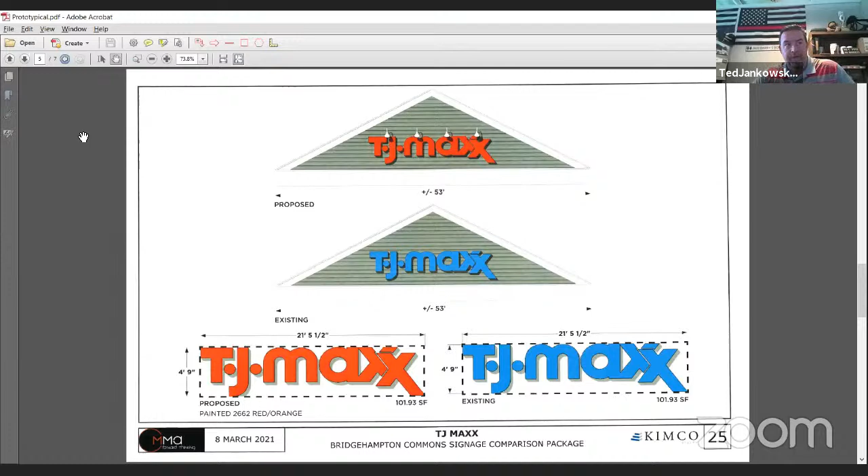With the drawing sent to scale? Yeah, they can send a drawing so we can look at it, but I'm just going by the measurements, 4'9" and the other one's 4 foot. So send a drawing so you can look at it and then approve it, but I'm going with the numbers that they have. Ms. Keyes? I agree with the lead on this, and thank you for taking the pieces when they come in. Okay, thank you.

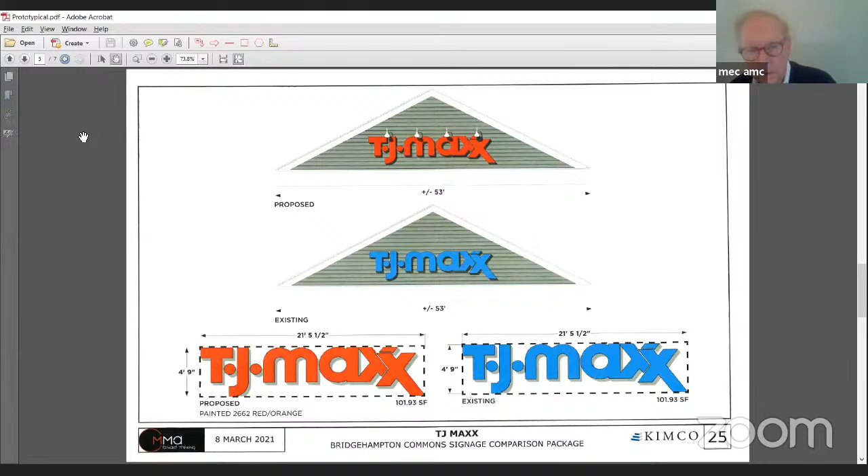All right, so depending on the drawings that are given, this is what the motion would be. Then we can approve the TJ Maxx and the Marshall sign. Okay, everyone agree to that? Yes. Okay, fine.

And I'm just thinking, Ms. Doyle? Yes, I don't know if she's still here. Okay, all right, how do we handle this? I get it and then approve it?

They're gonna send revised drawings. The signs do need to be approved by the entire board, but because it is a referral, you could come to consensus now, that you're all in agreement.

And then once you get the elevations, the renderings again, you could approve it. Okay, fine. And I can actually send it to the other two board members when I get it too.

Right, okay, fine. Because we had an original issue with this, with the TJ Maxx being way too large a while ago. And so that's one of the reasons we're re-looking at this.

And just, Mr. Chairman, if you get the elevations of the renderings and you don't agree with it, then I would bring it back before the board at another meeting, if you have any issues. And if you don't, then it would be okay.

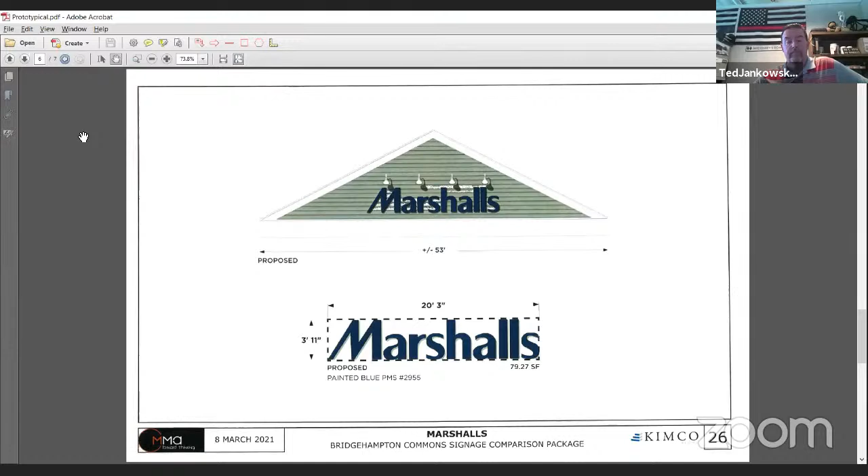Chairman, just for a point of clarification, so you guys have approved the TJ Maxx sign, and you are wondering whether the massing of the Marshall sign is good. So once you review it, then the only thing that could potentially change theoretically would be the Marshall sign.

Great, to scale. We had original problems where the TJ Maxx was much larger than the Marshalls, and we wanted both of them in proportion.

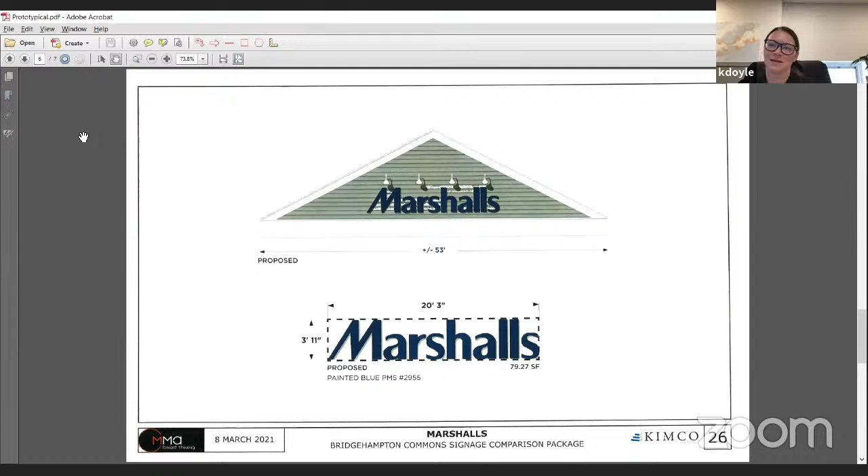Understood, so it's really a conditional approval, subject to the condition that you receive the elevations. It's subject to us verifying what we're telling the board, so that they're comfortable with it.

And if what we're saying is correct, then we're gonna be okay. Yeah, right, okay, great.

I would probably ask for maybe them to lower the sign a little bit because the top of their sign is hitting the lighting, and that's really not going to look that attractive. I would like to have it lowered below the lighting.

That's my only comment. Mr. Jankowski?

Ms. Keyes? I agree. Okay, do I hear a motion to approve on that basis with those conditions?

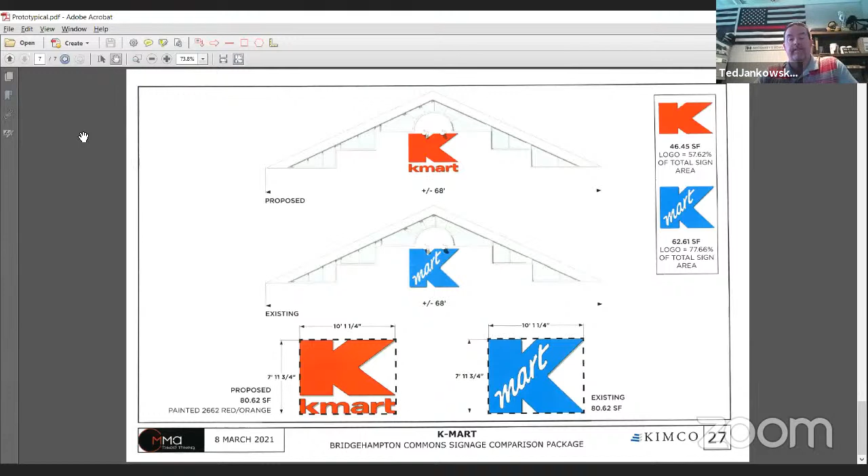Yeah, motion to approve as submitted, just lowering the K below where the lights are. Okay, or reducing the size if they want to do that. I don't know, I want to give them as much flexibility as possible.

So you don't want the lights overhanging the actual sign. Yeah, they're butting up against it, and that's okay, all right, all right. And if Kmart wants to keep it up higher, then they can just reduce the sign, you know.

But not have it all the way up to the lighting. Okay, okay, motion has been made.

Was it seconded? Ms. Keys, did you second? Seconded, yes. Motion has been made and seconded with the conditions on the Kmart sign. All those in favor? Aye.

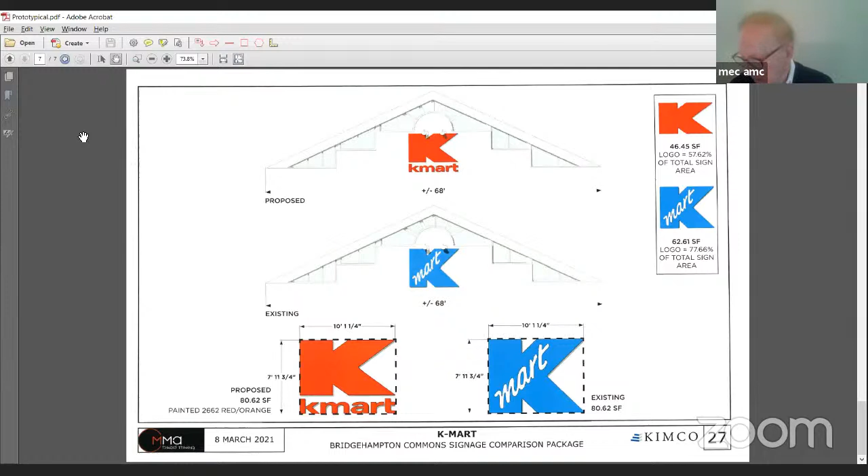Aye, aye, opposed? None, none. Okay, and the next one? No, that's it, that's it. That's it, okay, that's it.

Thank you very much for your accommodations, I appreciate it. Okay, thank you, fine, thank you, thanks everyone. Okay, is there any other items to come before the board?